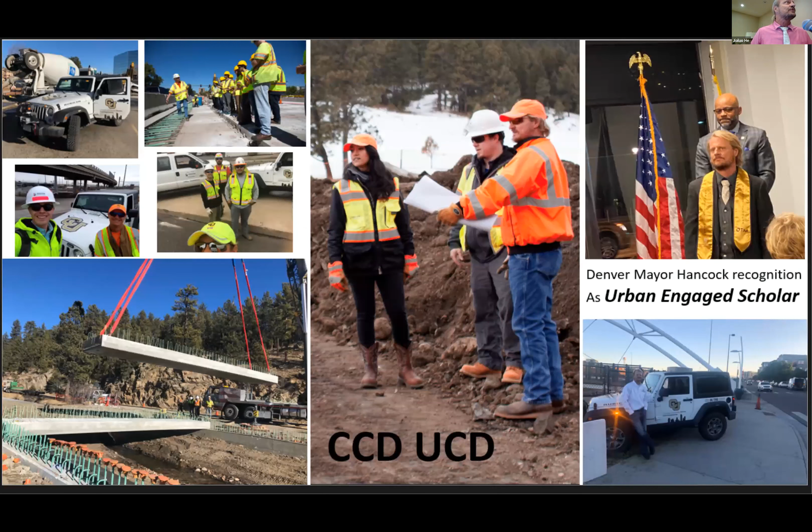2009 to present, chair of civil engineering, and 1997 to present, ongoing research work with the City and County of Denver. Hundreds of students have been involved in this particular research, where we're able to get all sorts of hands-on applied research, maintenance, rehabilitation.

So this is my dumb attempt to try to look smart. My professor, my friend Tong here, is going to answer any questions on neural network stuff from Penn State.

But nonetheless, we researched a lot of theory in both of these particular studies with the computer science department. And I think the neural networks are multiplying amongst themselves, okay? Learning, and new ones are being developed on an ongoing basis. We use all sorts of statistics; root mean square, I think, is the common way to look at your models

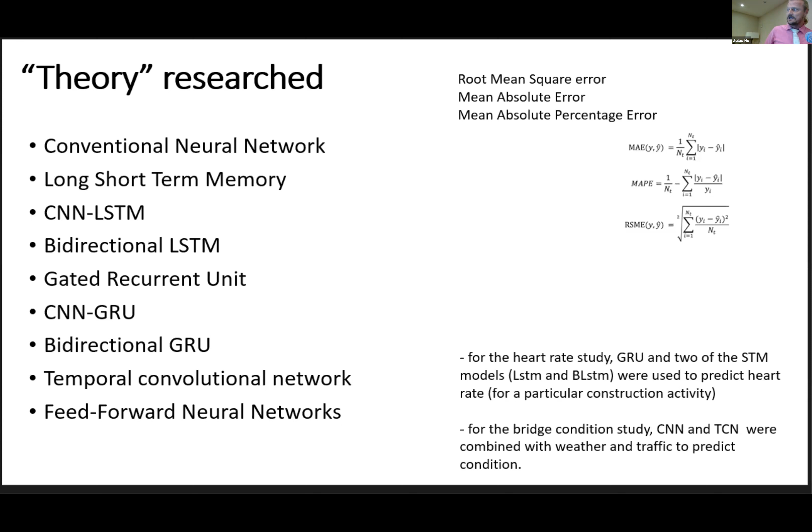and how they behave. For the heart rate study, we used two LSTM models and a GRU model to predict heart rate for a particular construction activity. For the bridge condition index study, we use CNN and TCN, just common off-the-shelf methods, combined with weather and traffic to predict condition.

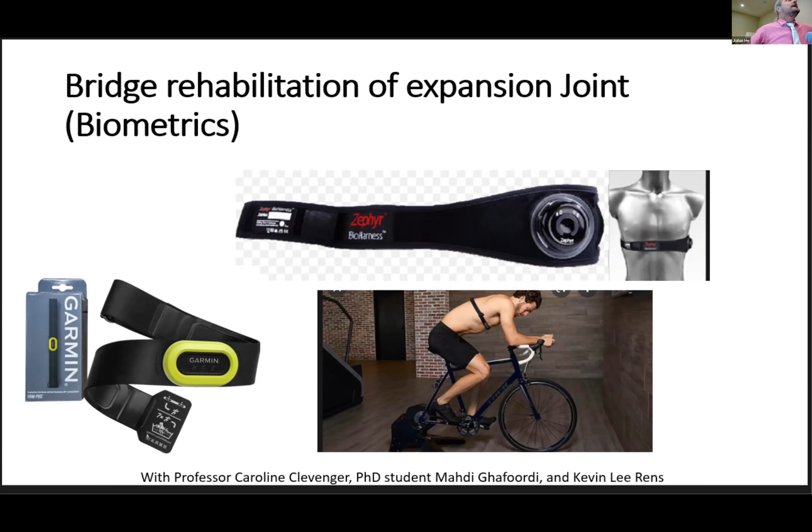So if you're into any sort of physical fitness activity, there are many of these Fitbit type devices off the shelf. We used a model called Zephyr and attached it to workers on the bridge rehabilitation of an expansion joint in Denver, Colorado. Below is what you would get out of just common physical fitness models like Garmin, like I'm wearing here. We use percentage of heart rate reserve to see what the humans were doing while they were doing their activities.

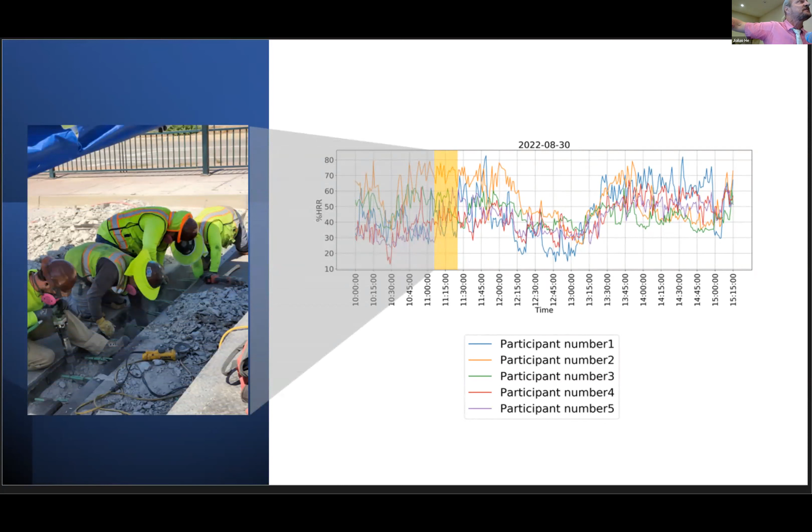Go through these slides very quickly. Heart rate of 5 participants through a 5-hour day while they're doing construction activities. There's a photograph to the left, and then it zooms in at the particular activity, what their heart rate was. Okay, so here they are, break time. I'll just pop through these real quickly.

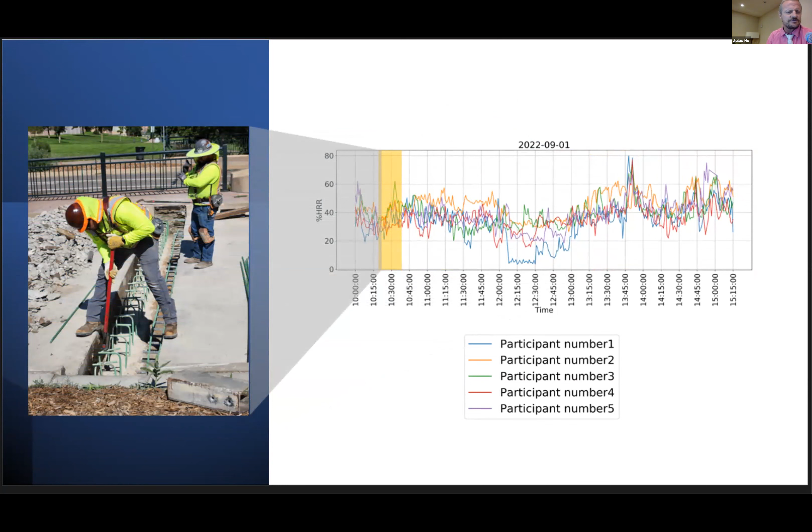Removing concrete joint, day 1, day 2, getting the cut and torch out. Break time, we're in day 2 yet. I'm just going through some of these real quickly here. They're cleaning out the joint on day 3. Break time. This guy took a nap, see that? Heart rate, nice low resting heart rate. Putting the body armor in on the expansion joint.

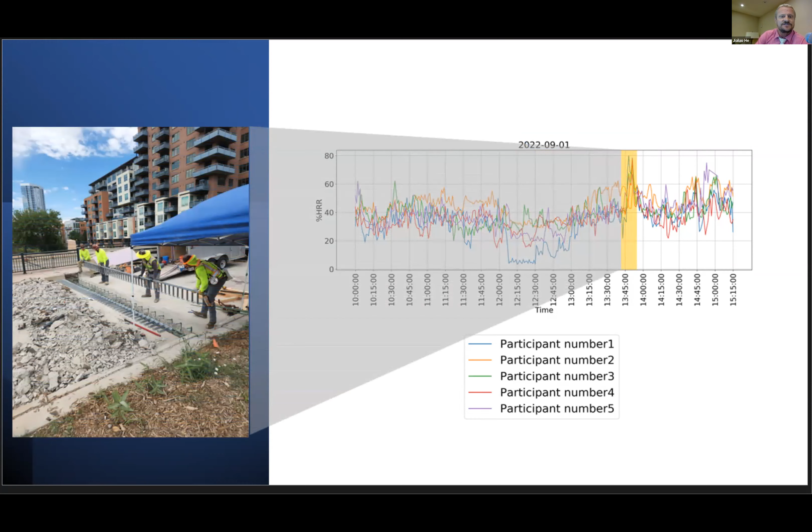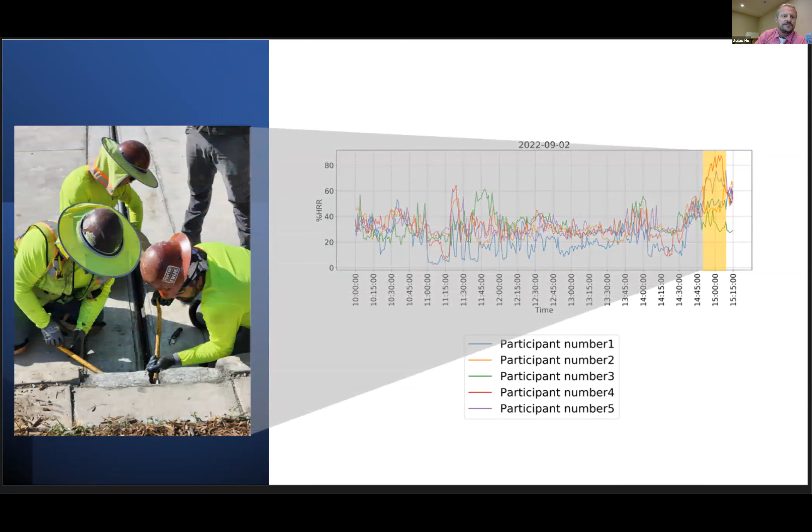Placing the concrete, day 4. Break time. Threading the gland for the expansion joint. So all in all, lots of activities we monitored on all the 4 days and tried to correlate back and forth with that particular activity.

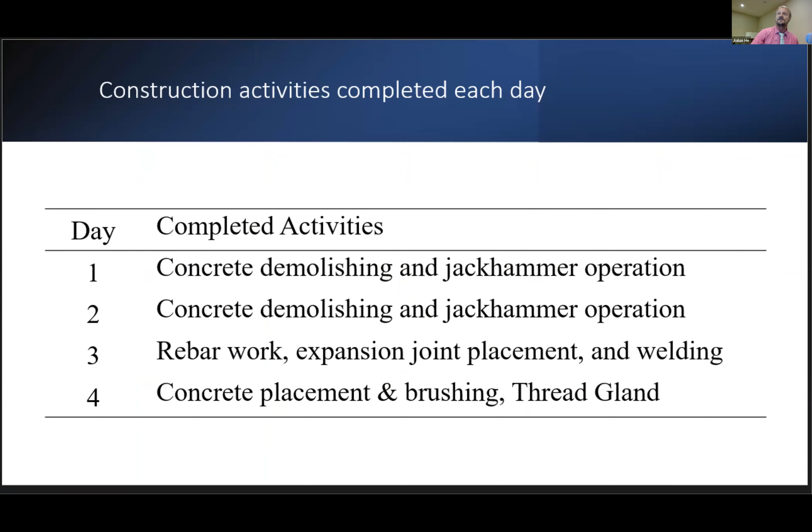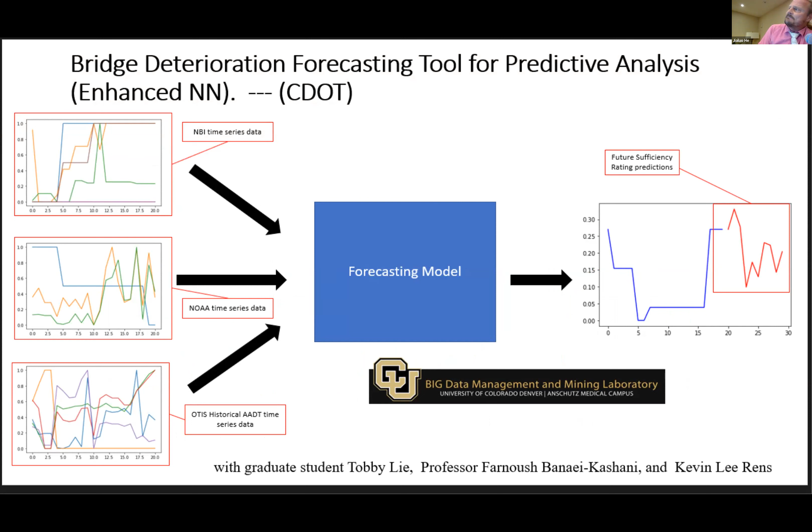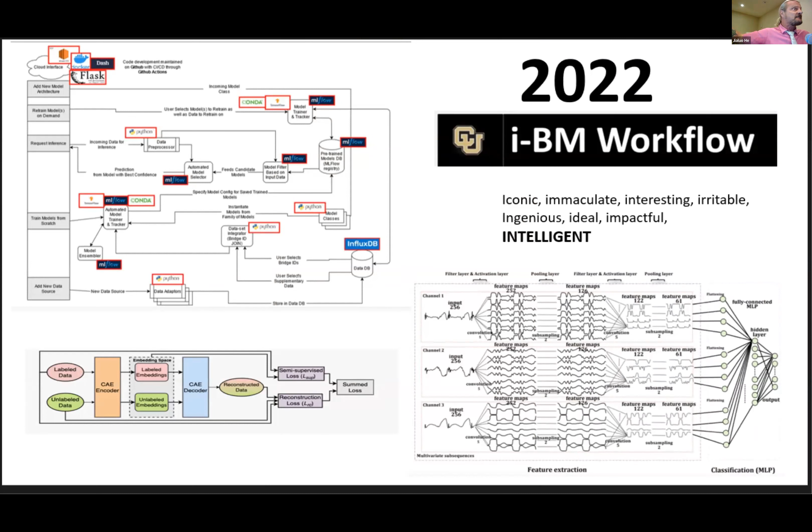This is a flow chart of inspection, rating, maintenance, rehabilitation, life cycle costs, that sort of thing. This is the very first paper I published in 1988 when I was with the Corps of Engineers. So what are we, 30 years later? This is what that workflow looks like out of the paper with all the neural network stuff. I know very little about this. I'm an applied user of neural network, and I'm trying to learn more as I go on here. We call it i-BM. You could say iconic, immaculate, interesting, irritable, ingenious, ideal, impactful, but it's intelligent bridge management is what we're calling it.

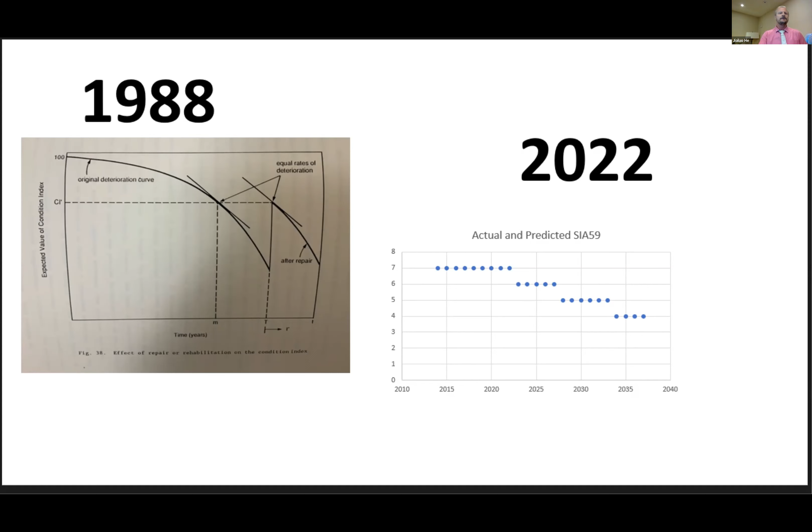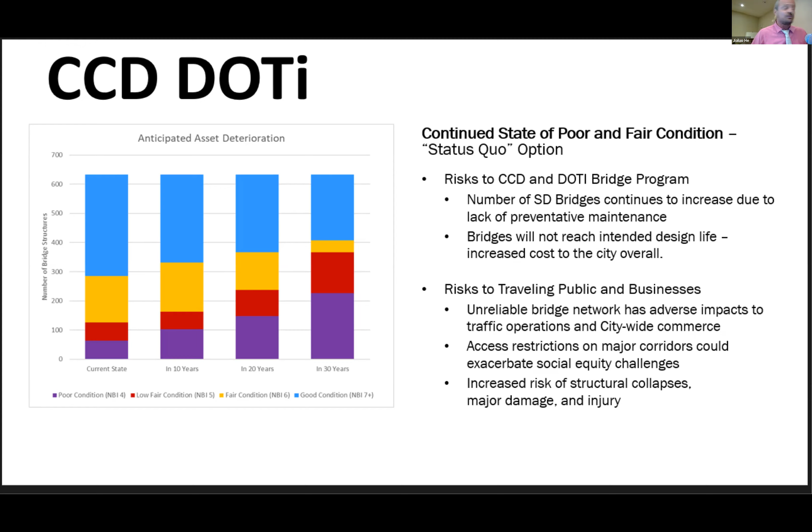But again, big data and human performance. We're using that in lots of different ways here. If you look at the NFL, that's all they talk about. The analytics say this, the analytics say that. Should we go for it or not on 4th down? They're just using neural networks, right, Tom? That's all they're doing there. It's everywhere. That's it.